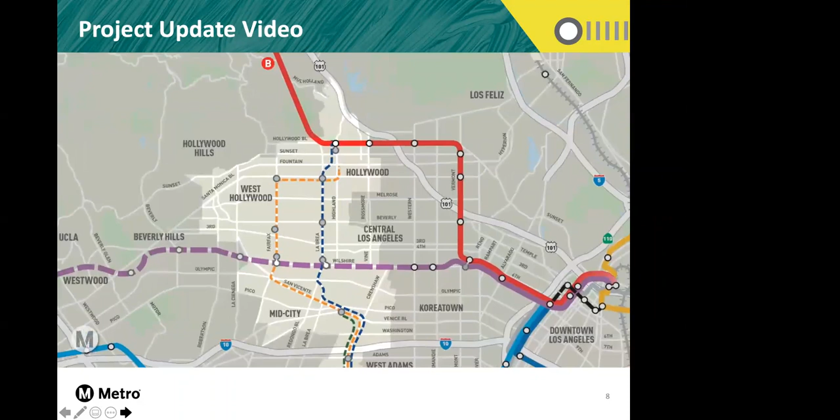The Fairfax alternative goes up Fairfax Avenue, connecting to the future Metro D line station at Wilshire Fairfax, with a station at Museum Row. From there, it heads north with a proposed station near the Grove. It turns east at Santa Monica Boulevard before connecting to the Metro B line at Hollywood Highland Station.

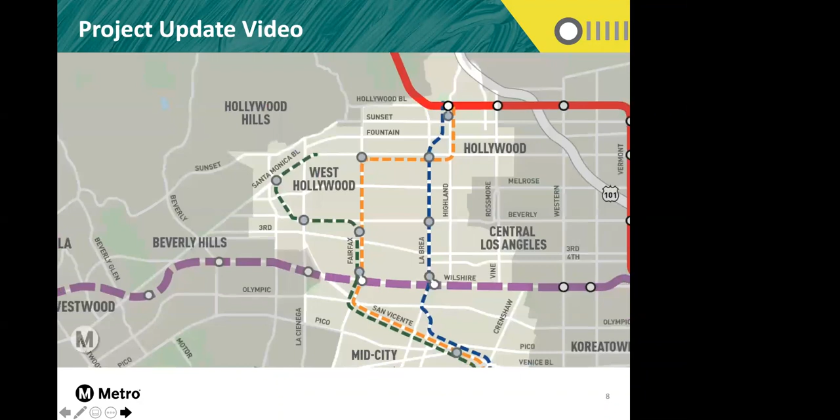The Fairfax-San Vicente alternative also goes north on Fairfax Avenue, with proposed stations to serve Museum Row and the Grove, before veering west on Beverly Boulevard to serve Cedars-Sinai Medical Center and the Beverly Center. It then turns north on San Vicente, with the proposed station to serve West Hollywood's Nightlife District and the Pacific Design Center, before turning east to link up to the Metro B line at the Hollywood Highland Station.

Based on public input, we've also added an optional Hollywood Bowl terminus to each of these alternatives. A station at the Hollywood Bowl could improve the travel options to this major regional destination while serving up to 1 million trips there each year.

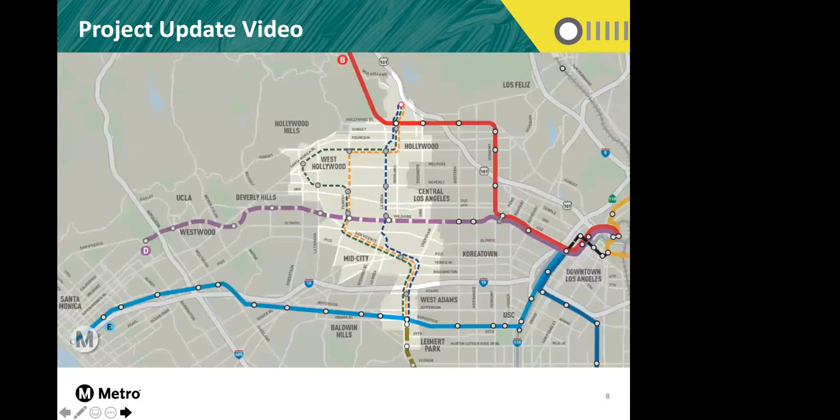These are the alternatives that we will be taking into the environmental process. Environmental review is a formal, regulated process where Metro will study various aspects of each alternative, including benefits, cost, feasibility, community impacts, and any necessary mitigations.

There are several points of community input during this process as Metro develops the Environmental Impact Report, which will recommend a proposed project to the Metro Board of Directors for approval. We are now embarking on the first step in this process, which is called scoping. At this stage, we want to hear from you about what Metro should consider and study as we prepare the Environmental Impact Report.

Environmental Impact Report for the Crenshaw Northern Extension. Possible comments might include input on destinations that you think are important to serve, what would make this a good transportation service for you, or concerns you might have about construction impacts.

We will be conducting formal scoping meetings where we can hear your comments. We'll also have information about the project online for you to browse on your own time. We can also take formal comments via mail, phone, email, and our website during the scoping comment period. Thank you for all of your input along the way that has helped to shape this project. And as always, if you have questions, please get in touch.

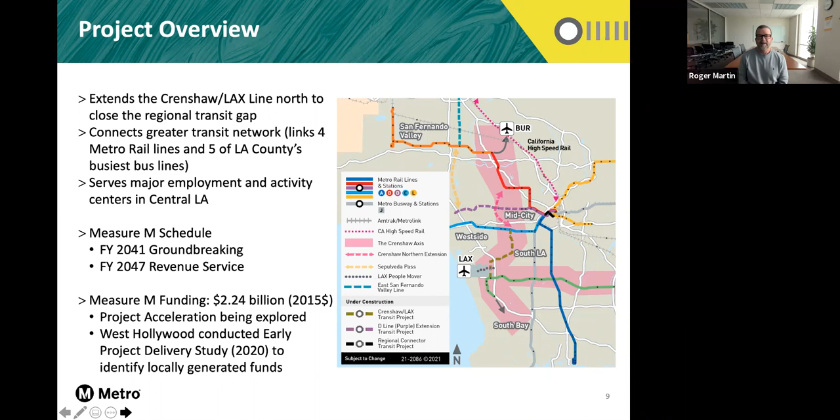The project aims to satisfy multiple objectives, including closing this regional transit network gap. We want to provide a fast and reliable transit alternative to congested roadways and highways. As many of you are aware, the project area is pretty congested due to the concentration of jobs, residents, and major destinations within this region. At the same time, travel within and through this area is constrained due to the high demand for travel, coupled with the limited roadway capacity.

What we want to do is improve the mobility and accessibility, not just within the project area in Central LA, but throughout the county and the wider region. And last, we want to cultivate a transit-friendly environment to maximize the potential for smart population and job growth. So if this project were to be constructed, it would greatly improve mobility and access to jobs and opportunities for all county residents, especially transit-dependent residents and equity-focused communities from the South Bay and South LA all the way to the San Fernando Valley. And with that, Alex is going to take you through the alignments and options, and I'll see you folks in a few minutes. Thank you.

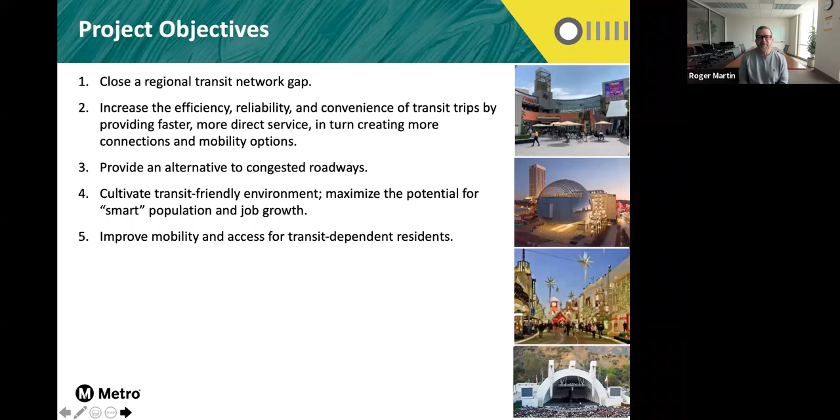This project would directly connect to the Purple Line in the Miracle Mile area. To the north in the San Fernando Valley, we have the North Hollywood Pasadena Bus Rapid Transit Project. And between the San Fernando Valley and the west side, there's the Sepulveda Transit Corridor, which will link these two regions and ultimately all the way down to LAX airport.

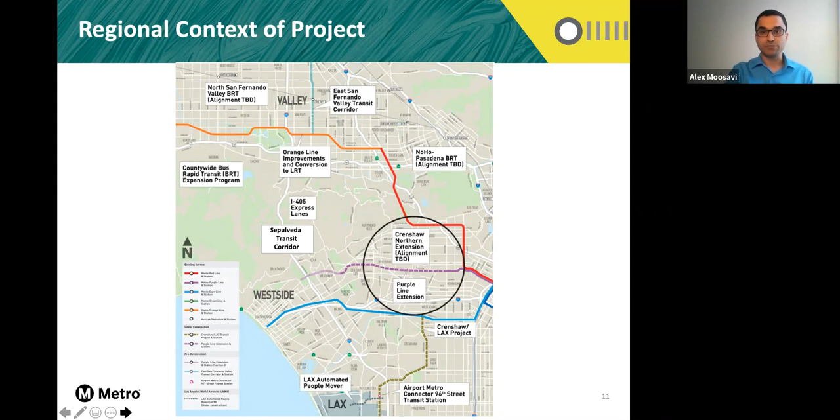Before I go into the specific alternatives for the project, here's a brief history of some of the past studies that are related to our current efforts.

From as far back as 2003, planning studies for the Crenshaw LAX line explored opportunities to extend the Crenshaw LAX line to Wilshire and the Purple Line, and even further north to Hollywood. However, due to funding constraints, any segment of the Crenshaw LAX line north of the Expo or E line was eliminated from the Crenshaw LAX line project back in 2009.

At roughly the same time, the West Side Subway Extension Draft EIS-EIR studied a potential heavy rail extension from Hollywood through West Hollywood and Mid-City West to the Purple Line on Wilshire.

The current studies for a northern extension of the Crenshaw LAX line began in 2016 with the passage of Measure M and Metro's board commitment to bring the project, along with others, to a shovel-ready status in case of potential funding opportunities for project acceleration.

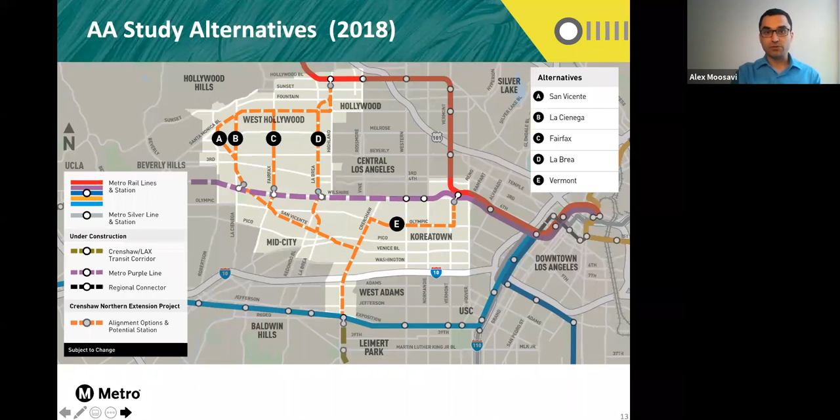The AA study showed that all alternatives to Hollywood would attract significant ridership with approximately 90,000 boardings or more on a daily basis. The La Brea alternative is the shortest, fastest, and most cost-efficient alignment. It's the most direct route between Mid-City and Hollywood with a minimum total of 6 new stations over about 6.5 miles. Part of the original alternatives analysis study looked at existing jobs and residents within just a half-mile walking distance of all the alternatives that extend to Hollywood.

This analysis showed that while all of the alternatives serve a significant number of jobs and residents, the Fairfax and Fairfax-San Vicente alternatives and stations serve the most jobs and residents by far by directly linking some of the biggest job centers in the region, including places like the Grove Farmers Market, CBS Television City, the Pacific Design Center, and the Cedars-Sinai Medical Center campus.

The jobs and residents analysis showed that compared to the La Brea alternative, the Fairfax alternative would serve more than twice the number of jobs than La Brea, and the San Vicente alternative would serve more than quadruple the number of jobs than La Brea, or double that of Fairfax. Even when broken down by distance, the longer Fairfax and San Vicente alternatives would serve significantly more residents and especially jobs per mile than La Brea.

In line with this analysis, existing transit ridership near potential project stations also reflects the heavy activity and congestion near some of the major job centers in the study area. Transit ridership near the Fairfax alternative stations is roughly 3 times that of the La Brea alternative stations, while transit ridership and boardings near the Fairfax San Vicente alternative stations is over 4 times that of La Brea.

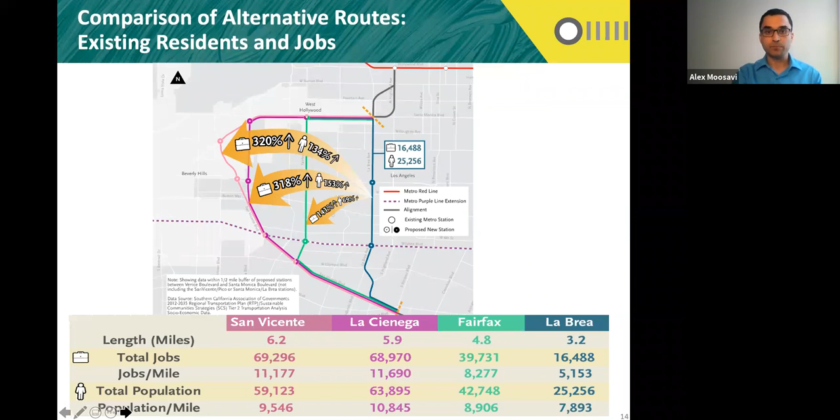This has largely been reflected in the comments and feedback we've received to date regarding the project. We've had several opportunities for public meetings throughout the previous studies and have collected a significant number of comments so far, many of which have shaped the current alternatives and options under study.

Overall, we've heard strong support for the project and accelerating it, opening sooner than the Measure M schedule date of 2047. We've also heard preferences for the project to serve some of the major destinations and job centers in the western half of the project area, including a desire to combine alternatives or build more than one, or even build all. We've also heard considerable support for extending the line further north than Hollywood Highland and the B or Red Line connection in order to serve the Hollywood Bowl at Highland and the 101.

Based on public feedback and additional technical analyses, we have refined the project alternatives to the 3 routes shown on this map for further study during this EIR environmental process. All of these alternatives would be entirely underground in a subway configuration, including everywhere north of Olympic and south of Venice. There is a potential exception to this along a small section of San Vicente Boulevard in Mid-City, which I'll get to shortly.

Before I go through each of the alternatives, I'd like to emphasize that all alternatives have the same station locations, both in the north and in the south. In the south, all the alternatives extend the Crenshaw LAX line north from its terminus at Crenshaw Expo, under Crenshaw Boulevard to a station at Crenshaw and Adams in West Adams. They all then continue north to a station at Midtown Crossing and the Pico Rimpau Transit Center in the heart of mid-city along San Vicente between Venice and Pico.

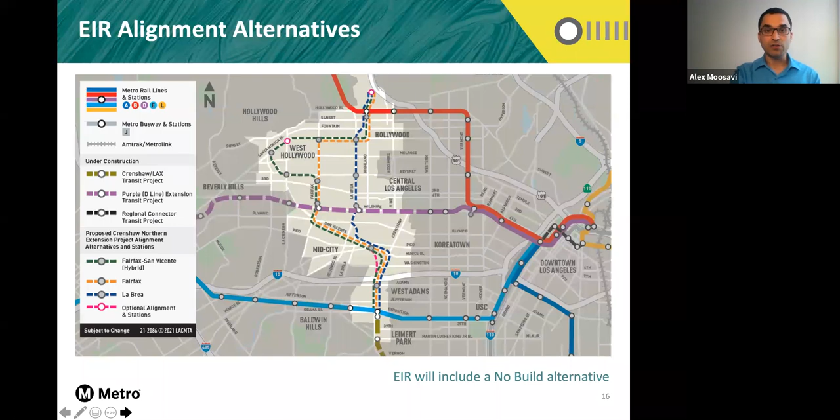As mentioned before, the La Brea alternative would have a minimum of 6 stations over 6.5 miles. The total travel time between the Expo line all the way to Hollywood Highland would be just over 12 minutes.

This next map gives some more context to the La Brea alternative, as well as the other 2 longer alternatives, which I'll go through now, Fairfax and Fairfax San Vicente. The Fairfax alternative would follow San Vicente Boulevard from Mid-City's Midtown Crossing Station, then Fairfax Avenue north through Miracle Mile and Mid-City West, with additional stations at Wilshire Fairfax to connect to the Metro D or Purple Line, and under Fairfax between 3rd and Beverly, near the Grove and CBS Television City.

It would then continue north to a station at Santa Monica and Fairfax in Central West Hollywood and proceed, just like La Brea and all the alternatives, to Santa Monica La Brea and Hollywood Highland with an optional extension to the Hollywood Bowl. This alternative would have a minimum of 7 stations over 8 miles, with the total end-to-end travel time to Hollywood Highland of about 15 minutes, or 3 minutes longer than La Brea.

And finally, the last alternative, the Fairfax San Vicente or hybrid alternative, would follow the exact same route and stations as the Fairfax alternative, north to a station at Wilshire Fairfax in Museum Row, and a station under Fairfax between Beverly and 3rd, near the Grove Farmers Market and CBS Television City. From there, it would veer west under Beverly Boulevard to a station at Beverly and La Cienega, near the Beverly Center, Beverly Connection, and Cedars-Sinai Medical Center campus.

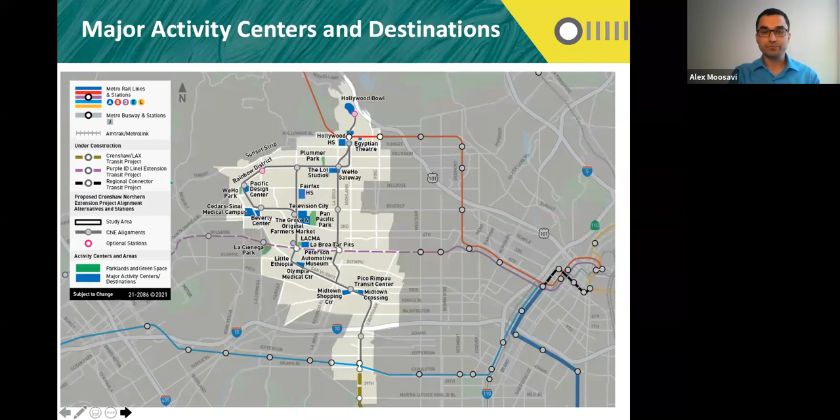Regardless of alternative, each line and extension, including this project, requires a maintenance and storage facility for the additional light rail vehicles that will be needed to operate this full line from South LA, South Bay, and LAX all the way to Hollywood.

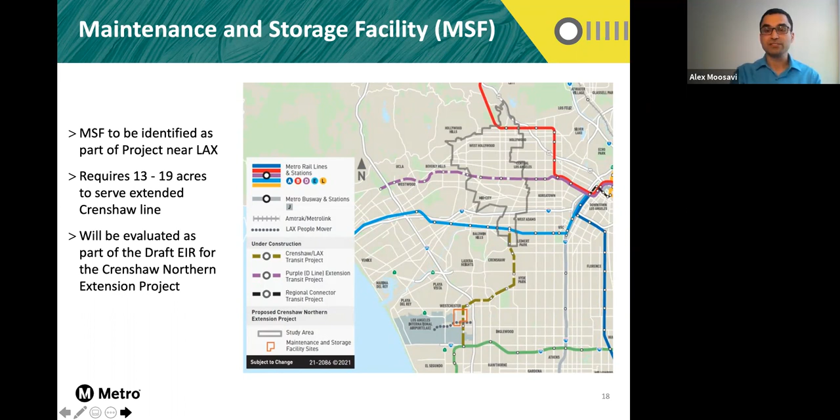The draft EIR will explore several potential sites for this facility adjacent to and near the current Southwest Yard that is being constructed for the current Crenshaw LAX line, which is located just northeast of LAX around the intersections of Aviation Boulevard and Arbor Vitae.

Cedars-Sinai to West Adams could be reduced from almost an hour today to just 10 minutes every time, regardless of traffic or time of day.

Leimert Park to Westwood could go from over an hour today to 26 minutes. And LAX all the way to Miracle Mile or the Grove could go from over an hour today to just half an hour every time, regardless of traffic.

In addition to the three different alternatives, there are several design options that we would like your input on, which are shown on this map. I'll go through each one starting in the south with the alignment options between West Adams and Mid-City.

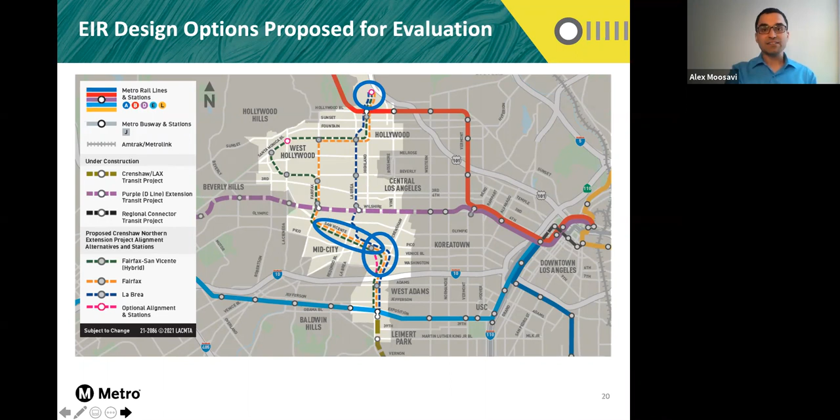The vast majority of the project, if not the entire project, could be in a subway or underground configuration. Depending on this next option, the entire project could be 100% subway or underground from end to end.

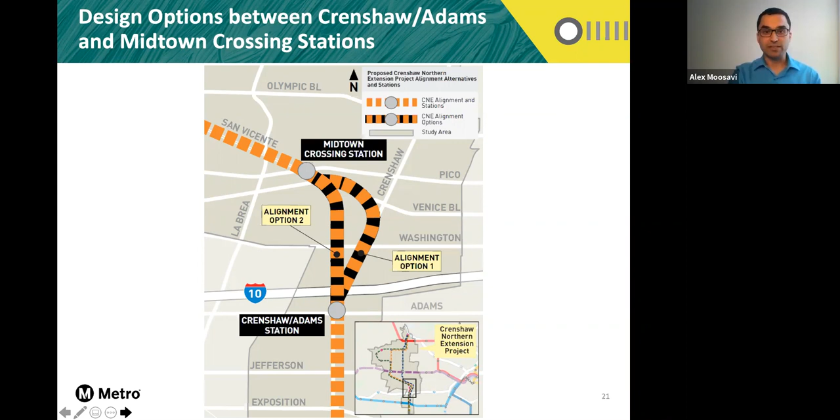Again, with this next option, the entire project would be in a subway.

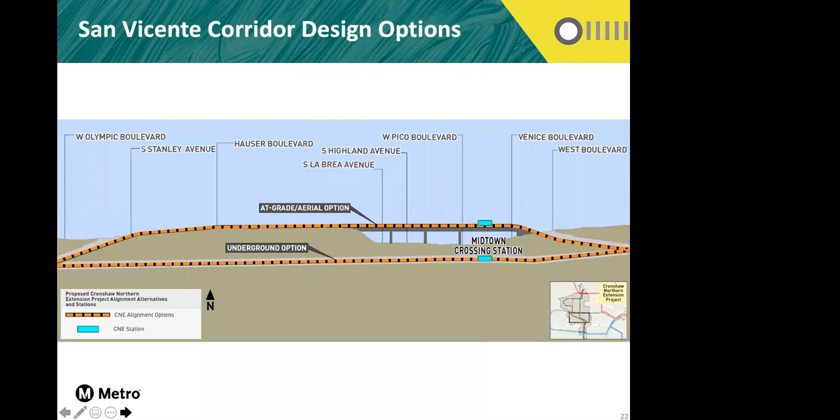We previously shared a vertical profile option that would include coming out of the ground in Mid-City, with potential at-grade rail in the median of San Vicente Boulevard, between approximately Stanley Avenue, which is just east of the San Vicente Fairfax Olympic intersection.

And La Brea Avenue, where it transitioned up to an aerial structure to serve an aerial station at Midtown Crossing before going back underground near the West Boulevard Bridge.

Based on feedback we've heard from the community, we have added a fully underground or subway design option for this section, including an underground or subway station at Midtown Crossing.

The rest of the project, regardless of alternative or option, would run in a subway or underground configuration due to a variety of major factors, including heavy traffic volumes and congestion, existing roadway widths and limited capacities, adjacent land uses, and the need to be grade separated from traffic at major intersections.

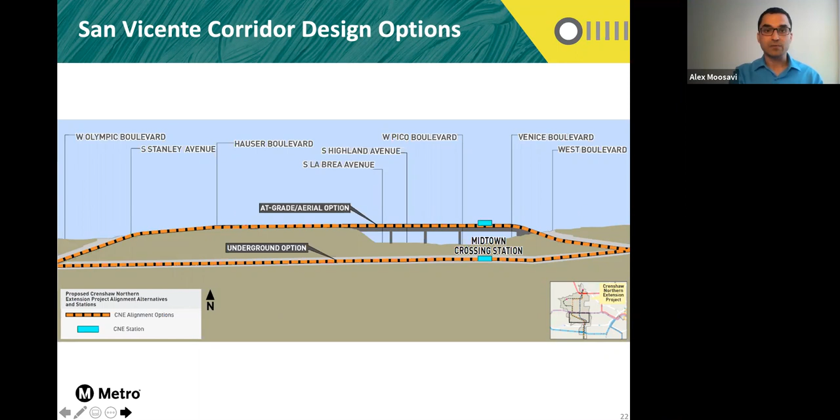With this San Vicente subway design option included, the entire project, regardless of alternative, would be 100% entirely in a subway or underground configuration. And finally, at the northern end of the project, we've added an option to extend the line further north from Hollywood Highland and the B Red Line, with the potential northern terminus station at the Hollywood Bowl near Highland and the 101 freeway.

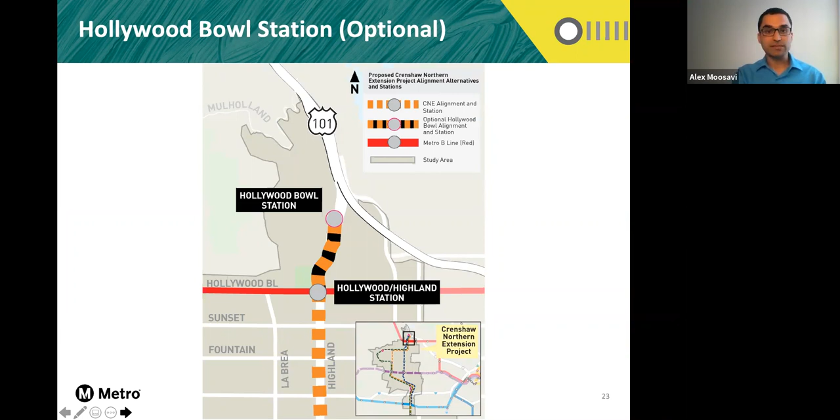And now Roger will take us through the EIR process and next steps for the project.

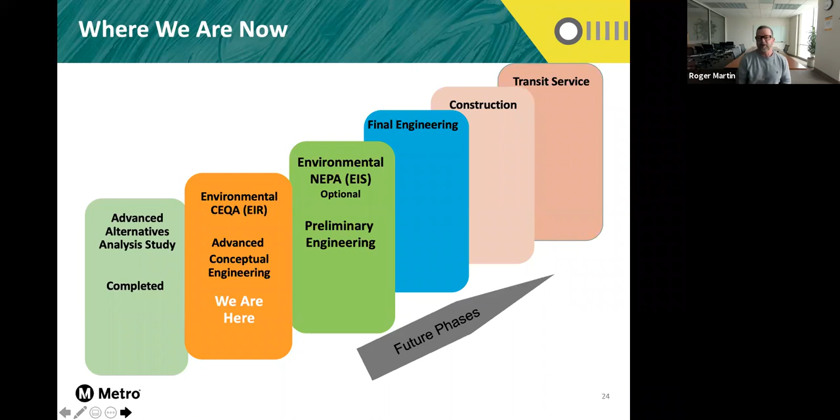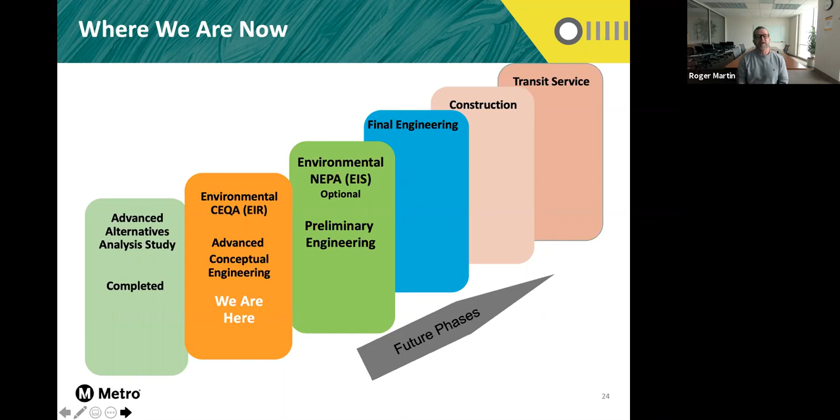As we mentioned before, we're currently in the state environmental clearance phase of the project, working on the draft environmental impact report and advanced conceptual engineering. Advanced conceptual engineering is what we actually use to feed into the draft environmental impact report. But following this work, the project will need to go through further engineering and design work, including possible federal environmental clearance if any federal funds were to be identified for the project. After that, final engineering, design, and construction can begin, followed by revenue service of this line.

The EIR analysis will also include a full assessment of impacts during construction of the project. Station construction is generally where we have our biggest impacts, because excavation is only generally at the stations. In between, the tunnel boring machines go under the streets and under properties, and we're pretty good there. So at the intersections around the stations, we may generally close an intersection for several weekends where we go in and excavate about 10 feet down, put cross beams across the street, and then put a concrete deck over that. For the next several years, we're actually building the station underneath the street without having these impacts to traffic and transportation.

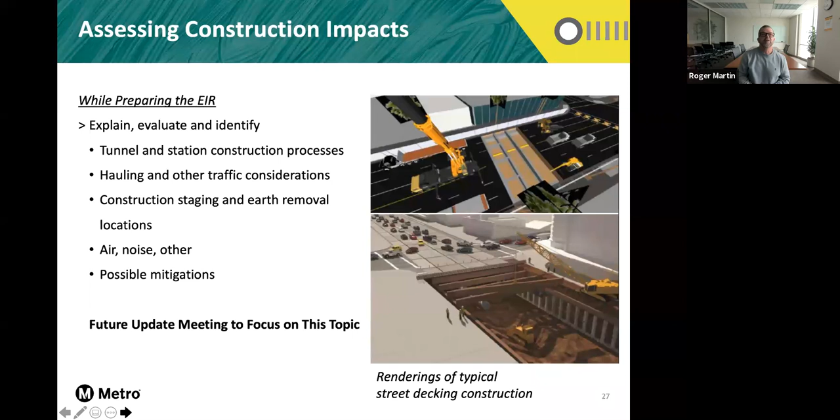But the EIR will evaluate and identify the tunnel and station construction processes for all the proposed alternatives, including truck hauling routes and other traffic considerations, as well as air quality, noise levels, and other specific construction activities.

Now we're going to talk about funding considerations. The EIR will also include a more detailed analysis of costs for the project alternatives, building off the initial estimates from previous studies. Each of these alternatives will cost more than the Measure M allocation for this project, so other potential funding sources would be crucial for project feasibility. These sources could include unidentified federal, state, and/or local funding, as well as value capture mechanisms and potential public-private partnerships that could help shoulder some of these additional costs.

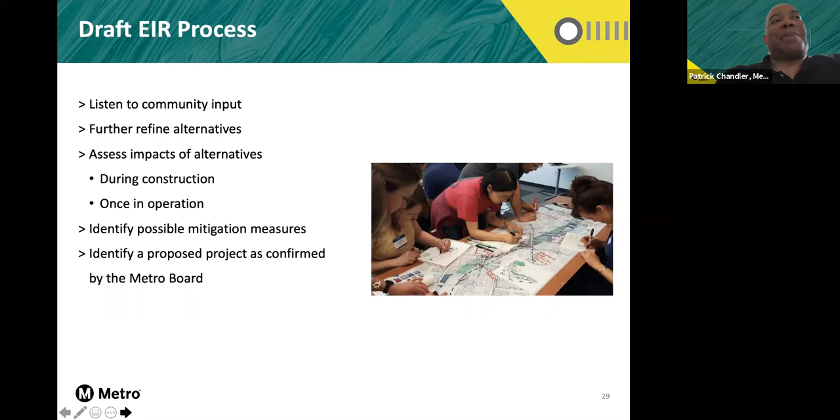After we receive all of your comments during the scoping period, we will prepare a scoping report which summarizes all the comments, and we will use all that information as we go forward in the environmental process, including future community meetings to provide periodic updates for the community. Right now we're at the beginning of May, and I assume we'll be back in the fall with an update on all the comments we've heard, what the next steps are, and an update on how we are proceeding with the analysis.